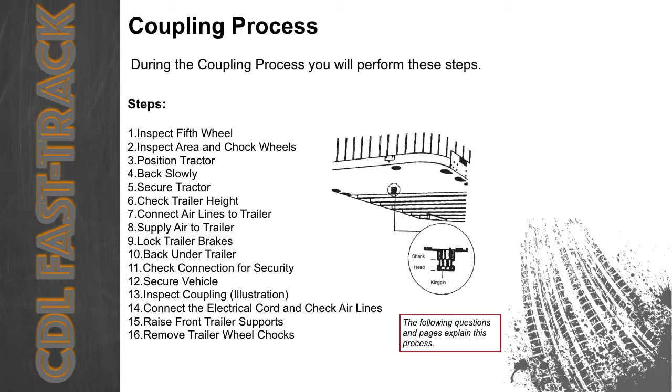You should always keep the fifth wheel greased properly. Failure to do so will cause...

Step 1. Inspecting the fifth wheel. Check for damaged or missing parts. Check to see that the mounting to the tractor is secure with no cracks in the frame.

Be sure that the fifth wheel plate is greased as required. Failure to keep the fifth wheel plate lubricated could cause steering problems because of friction between the tractor and the trailer.

Check to see if the fifth wheel is in the proper position for the coupling. The wheel needs to be tilted downward towards the rear of the tractor. The jaws need to be open, and the safety unlocking handle is in the automatic lock position.

Now, if you have a sliding fifth wheel, make sure it's locked. Make sure the trailer kingpin is not bent or broken.

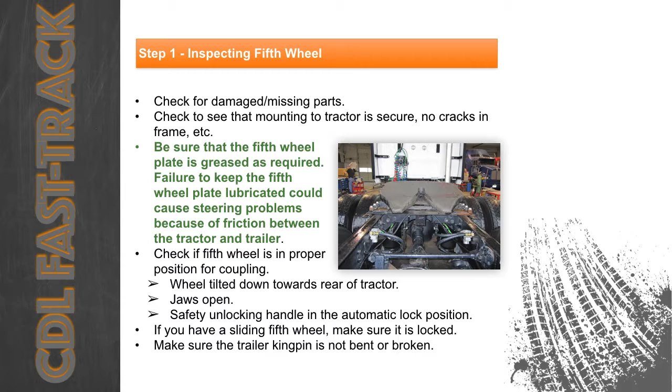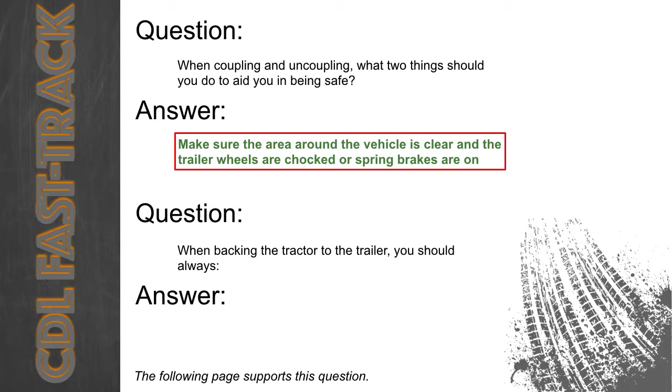When coupling and uncoupling, what two things should you do to aid you in being safe? When backing the tractor to the trailer, you should always...

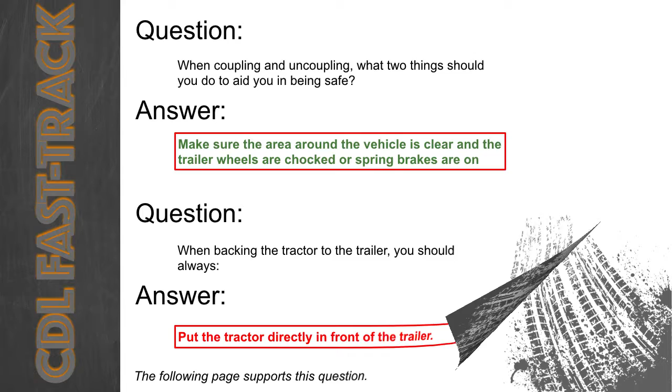Step 2. Inspect the area and chock the wheels. Make sure that the area around the vehicle is clear. Be sure that the trailer wheels are chocked or spring brakes are on. Check that the cargo, if you have any, is secured against movement due to the tractor being coupled to the trailer.

Step 3. Position the tractor. Put the tractor directly in front of the trailer. Never back under the trailer at an angle because you might push the trailer sideways and break the landing gear. Check your position using outside mirrors by looking down both sides of the trailer.

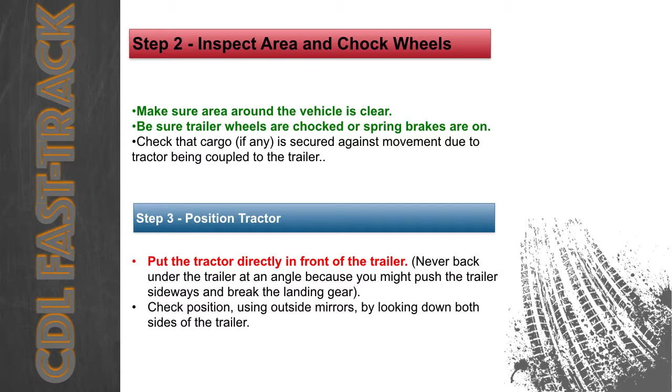Step 4. Back slowly. Back until the fifth wheel just touches the trailer. Do not hit the trailer. Step 5 is securing the tractor. Put on the parking brake and put the transmission in neutral.

When backing a tractor under a trailer, you should expect...

Step 6. Check the trailer height. The trailer should be low enough that it is raised slightly by the tractor when the tractor is backed under it. Raise or lower the trailer as needed. If the trailer is too low, the tractor may strike and damage the nose of the trailer. If the trailer is too high, it may not couple correctly. Check that the kingpin and fifth wheel are aligned.

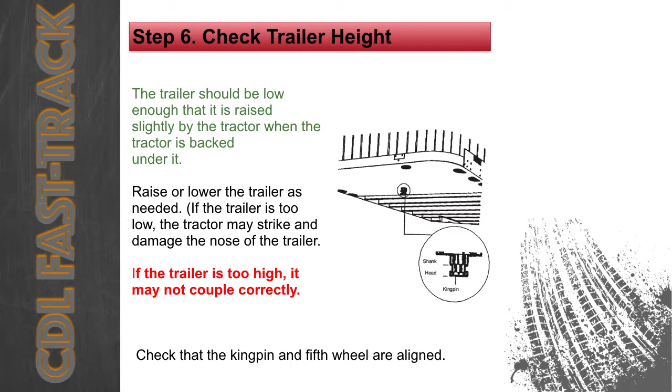After backing under the trailer, but before connecting to the fifth wheel, you should...

Step 7. Connect air lines to the trailer. Check the glad hand seals and connect the tractor emergency air line to the trailer emergency glad hand. Check glad hand seals and connect the tractor service air line to the trailer service glad hand. Make sure that the air lines are safely supported where they won't be crushed or caught while the tractor is backing under the trailer.

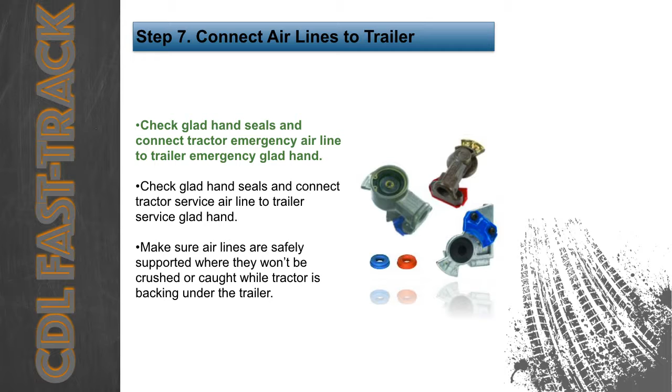After connecting the air lines but before backing under the trailer, you should... After you supply air to the trailer, make sure that the air lines are not crossed.

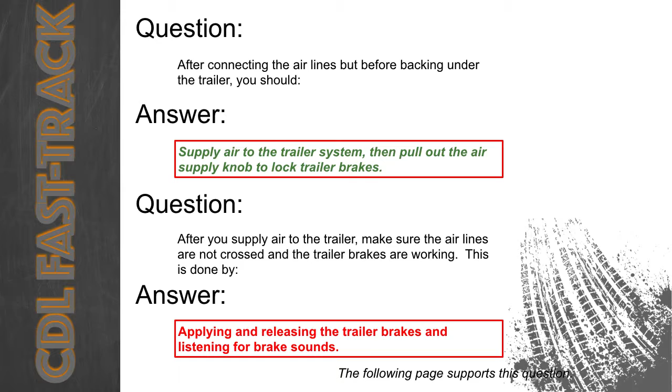Step 8. Supplying air to the trailer. From the cab, push in the air supply knob or move the tractor protection valve control from the emergency to the normal position to supply air to the trailer brake system. Wait until the air pressure is normal. Check the brake system for crossed air lines.

Shut the engine off so that you can hear the brakes. Apply and release the trailer brakes and listen for the sound of the trailer brakes being applied and released. You should hear the brakes move when applied and air escape when the brakes are released. Check the air brake system pressure gauge for signs of major air loss. When you are sure the trailer brakes are working, start the engine. Make sure air pressure is up to normal.

Step 9. Lock the trailer brakes. Pull out the air supply knob or move the tractor protection valve control from normal to emergency.

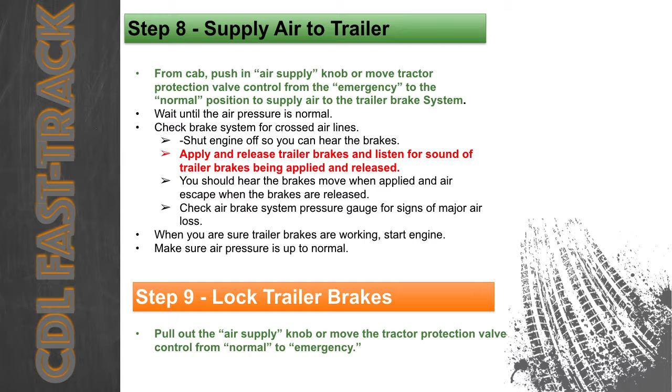When backing a tractor under a trailer, you should...

Step 10. Back under the trailer. Use the lowest reverse gear. Back the tractor slowly under the trailer to avoid hitting the kingpin too hard. Stop when the kingpin is locked into the fifth wheel.

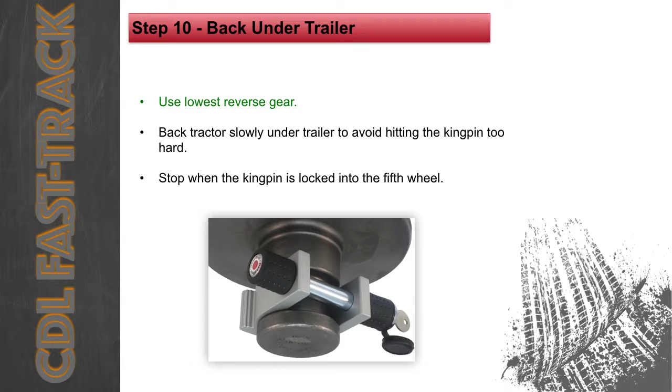After you lock the kingpin into the fifth wheel, you should check the connection by...

Step 11. Check the connection for security. Raise the trailer landing gear slightly off the ground. Pull the tractor gently forward while the trailer brakes are still locked. This is to check that the tractor is locked onto the trailer.

When securing your truck, you should put the transmission in neutral, put parking brakes on, and...

Step 12. Secure the vehicle. Put the transmission in neutral, put the parking brakes on, and shut off the engine and take the keys with you so someone else won't move the truck while you're under it.

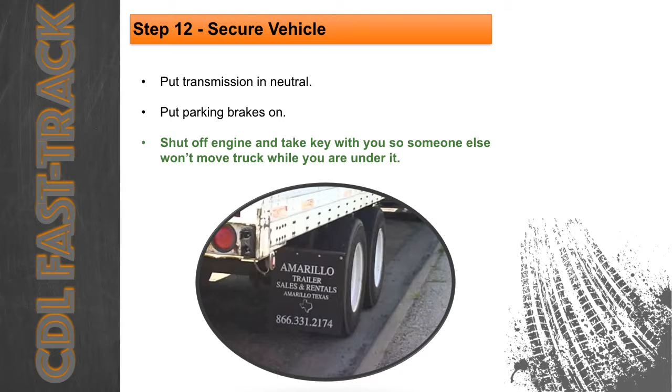After coupling, how much space should be between the upper and lower fifth wheel? The safety catch for the fifth wheel locking lever must be engaged for a coupling to be complete.

Step 13. Inspect your coupling. Use a flashlight if necessary. Make sure that there's no space between the upper and lower fifth wheel. If there is space, something's wrong. The kingpin may be on top of the closed fifth wheel jaws. If this were to happen, the trailer would become loose.

Go under the trailer and look into the back of the fifth wheel. Make sure that the fifth wheel jaws have closed around the shank of the kingpin. Check that the locking lever is in the lock position. Check that the safety latch is in position over the locking lever. On some fifth wheels, the catch must be put in place by hand. If the coupling isn't right, then don't drive the coupled unit. Get it fixed.

Step 14. Connect the electrical cord and check the air lines. Plug the electrical cord into the trailer and fasten the safety catch. Check that both air lines and electrical lines don't have any sign of damage, and make sure that the air and electrical lines will not hit any moving part of the vehicle.

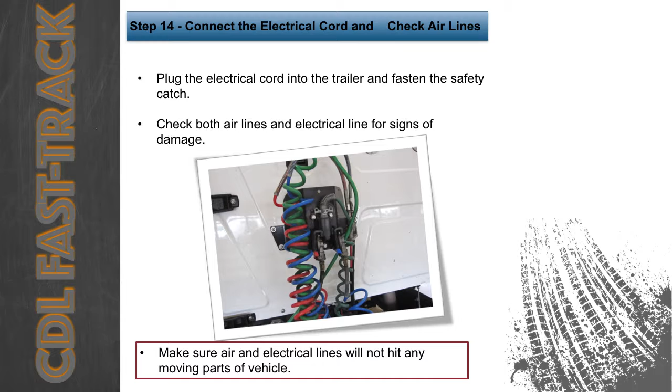After you've coupled the trailer, you should begin raising the landing gear by using the crank. How far off of the ground should the landing gear be raised?

Now let's talk about the uncoupling process. During the uncoupling process, you're going to perform these 10 steps. So let's review.

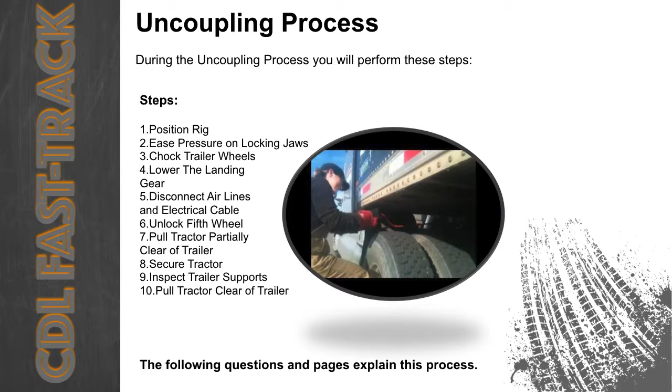Step 1. Positioning your rig. Make sure that the surface of the parking area can support the weight of the trailer. Have the tractor lined up with the trailer. Pulling out at an angle can damage the landing gear.

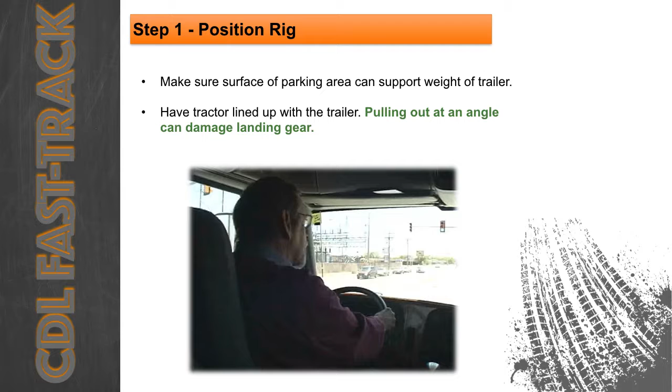When uncoupling a trailer, and this is after you've shut off the trailer air supply and locked the trailer brakes, you should...

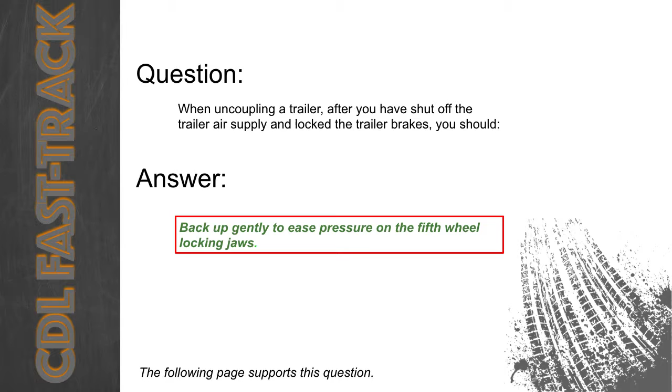Step 2. Ease the pressure on the locking jaws. When uncoupling a trailer, after you've shut off the trailer air supply and locked the trailer brakes, you should ease pressure on the locking jaws. To do this, you should shut off the trailer air supply to lock the trailer brakes. Ease the pressure on the fifth wheel locking jaws by backing up gently. This will help you release the fifth wheel's locking lever. Put the parking brakes on while the tractor is pushing against the kingpin. This will hold the rig with the pressure off the locking jaw.

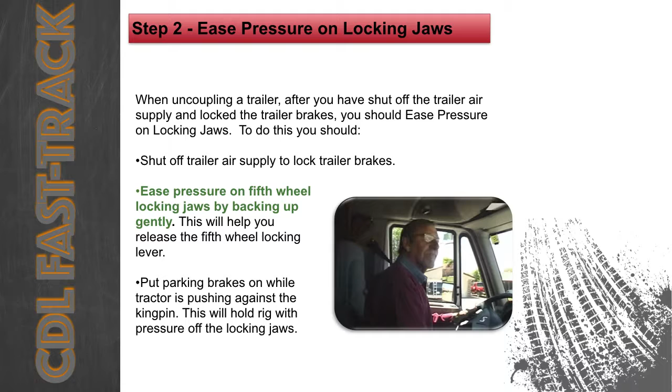When uncoupling a trailer, if the trailer doesn't have spring brakes or you're not sure...

Step 3. Chock the trailer wheels. Chock the trailer wheels if the trailer doesn't have spring brakes or if you don't know they do. The air could leak out of the trailer air tanks, releasing its emergency brakes. Without chocks, the trailer could move.

Step 4. Lower your landing gear. If the trailer is empty, lower the landing gear until it makes firm contact with the ground. If the trailer is loaded, after the landing gear makes firm contact with the ground, turn the crank in low gear a few extra turns. This will lift some weight off of the tractor. Don't try to lift the trailer off the fifth wheel. This will make it easier to unlatch the fifth wheel. It also makes it easier to couple the next time.

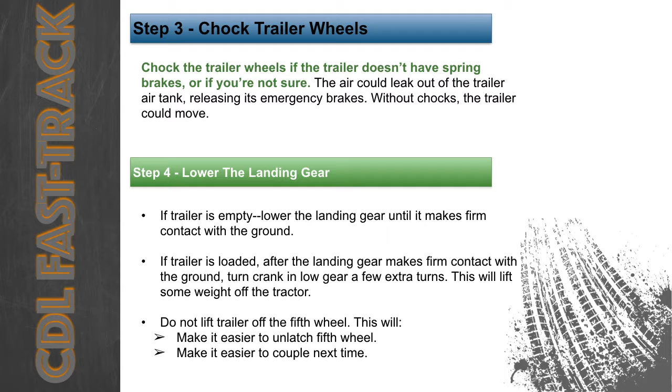After unplugging the electrical cable, you should...

Step 5. Disconnect the air lines and the electrical cable. Disconnect air lines from the trailer. Connect the airline glad hands to the dummy couplers at the back of the cab or couple them together. Hang the electrical cable with plug down to prevent moisture from entering it. Make sure that the lines are supported so they won't be damaged while driving the tractor.

Step 6. Unlock the fifth wheel. Raise the release handle lock. Pull the release handle to the open position. Keep legs and feet clear of the rear tractor wheels to avoid serious injury in case the vehicle moves.

Step 7. Pull the tractor partially clear of the trailer. Pull the tractor forward until the fifth wheel comes out from under the trailer. Stop with the tractor frame under the trailer. This prevents the trailer from falling to the ground if the landing gear should collapse or sink.

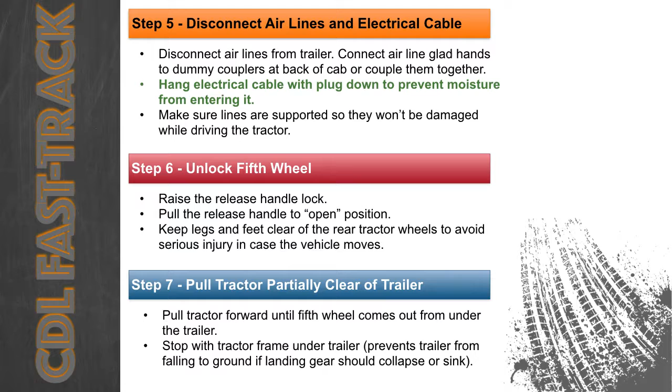While securing the tractor, you should apply the parking brake and then... Step 8. Secure the tractor. Apply the parking brake. Place the transmission in neutral.

Step 9. Inspect the trailer supports. Make sure the ground is supporting the trailer. Make sure the landing gear is not damaged.

Step 10. Pull the tractor clear of the trailer. Release the parking brakes and check the area and drive the tractor forward until it clears.